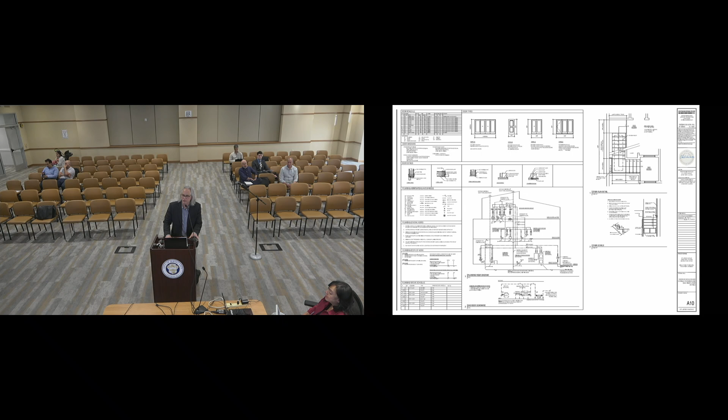I wanted to revisit in a little bit more detail the materials package we sent and uploaded to the Tyler portal that you guys should have a copy of, so we can go a little bit more into the details of what the materials will be, the ones visible from the public right of way and the ones on the rear elevation. So what you're seeing now is the existing front elevation.

There was a renovation done to this project back in 2021, so this is all brand new brick and a brand new roof, brand new windows in the front. And that's when these owners moved in, after that renovation was done by a previous owner.

The new proposal calls for that addition in the back where we get this 6 feet of kind of vertical wall at the ridge height.

After speaking with staff with the previously approved project at 575A, we thought the best approach was to try to make this as nondescript as possible, make it almost invisible as best as we could. So we used fiber cement panels as opposed to, let's say, a 7-inch lap siding, which we felt may be a little bit too busy at the top.

Plus the fiber cement panels are a little bit more contemporary. They were much easier to install. You'll notice that the color that we're using is a pearl gray for the fiber cement panel. The coping is an aged pewter, so the coping and the trim is going to get a little bit darker. You'll see this in a second in one of the other images.

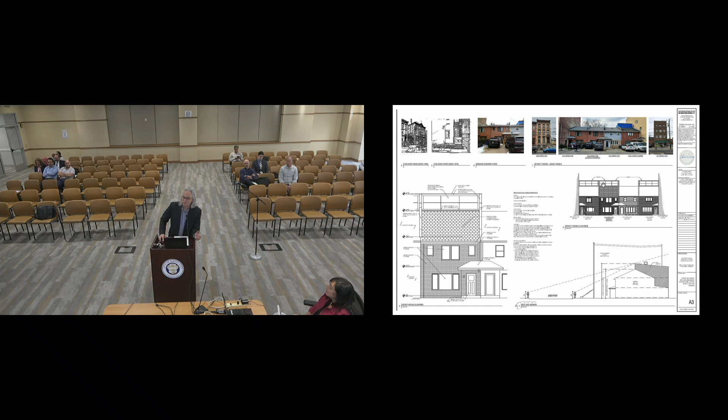And we are keeping that building footprint. We are going to have to tear off the existing roof because the structure wasn't compatible to hold floor loads and other loads. I'll get into the details when we get into the sections. But what you can see here is this is essentially the addition, that hatched area. Again, this will be visible from the public right of way. And to Commissioner Blazak's point, it is proposed based on what has been done before.

I would love to revisit the front wall. I would love to do it with every one of the clients, but this is where we're at the moment with the design. And I don't know if we'll be able to do that once we drop those ceilings.

To move on with this project a little bit more, existing conditions are a little different. You'll notice at the ground floor area — I'm going to use the cursor here, so if you're following along on your screen, this back area here is the existing dining room, this addition that was done previously. You can see that in the rear elevation.

It's a partial gable roof and a partial shed roof from the back of the rear wall. They had built it that way because they wanted 9-foot to 10-foot coffered ceilings, never thinking they were going to do an addition. You can see that with the clerestory glass that's here. All of that is going to end up being removed. I'll show you why in a second.

Essentially the floor plan layout is similar to the other unit at 571: 2 bedrooms in the rear, a bedroom in the front, 2 full baths. The ground level has the dining room already with the footprint back here, so it doesn't need a new foundation, like the adjacent property. For the most part, the existing front is not going to be touched.

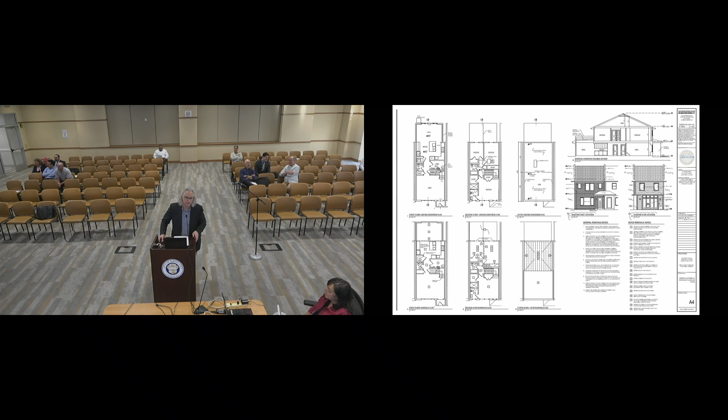Moving to the proposed plans, you can see we're going to try to emulate the coffered ceiling they had here before. We're not going to have the height to do it, so we'll show you that when you see the section. But this is the existing condition at the ground floor, so we're not adding a foundation, and we're not adding to the footprint down here.

What I want to make sure you're aware of is that at the ground level, there's a space between the adjacent building at 575 to the north and the existing rear wall, the northern wall of that dining room. There's a gap here, and this is where all the existing stormwater drains go for the building at 575 right next door -- not 575A, but the building right next door.

So we didn't want to touch that. When you get up to the second floor, you'll notice that the 2 bedrooms extend fully to the rear wall, but they also extend right to the edge of the property line. So we're actually cantilevering over that space so that we get the full width when we go up to the second and third floor. Otherwise, it would have been incredibly narrow, and with this lot already at 18.75 feet, the bedrooms are pretty narrow in the back when you split them in half.

So we're cantilevering over the back. The difference up here is that in this particular approach, the clients wanted a much larger family room. They've got more children than the adjacent properties, so they have more reason to be inside. They didn't want an exterior deck, just more room inside, more flexible space. But they've also added a full bath up there. So that's the kind of layout and approach for this particular project.

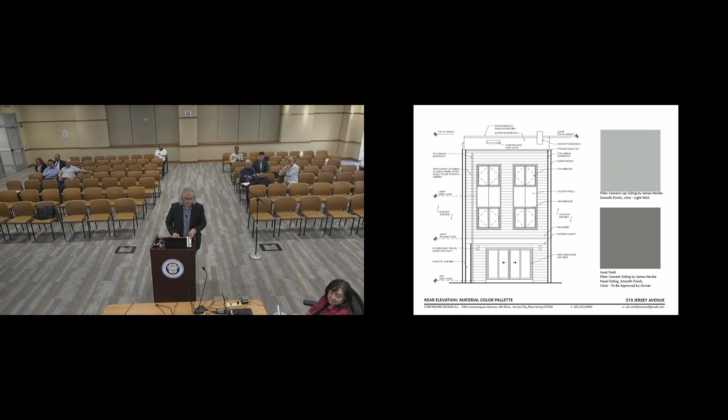Any questions? No? Okay, so if that concludes your testimony, then we can move on to public comment.

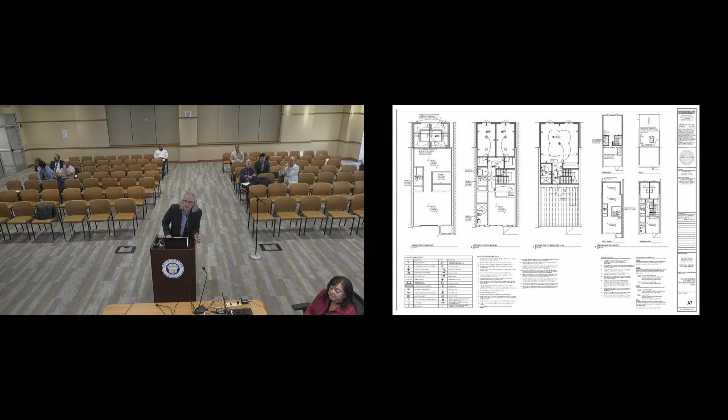The planes are going to be a little bit different because the slopes are going to be a little bit different, and it's easier to show you this in section. Because this slope is running all the way to the back here, we are extending this all the way to the back, trying to match it with the same exact slope that's next to it. We should be able to do that and still make headroom here. That's the goal. The easier way to imagine it—if everybody can imagine where this dimension line is—imagine the roof had stopped there and then there was a deck out here.

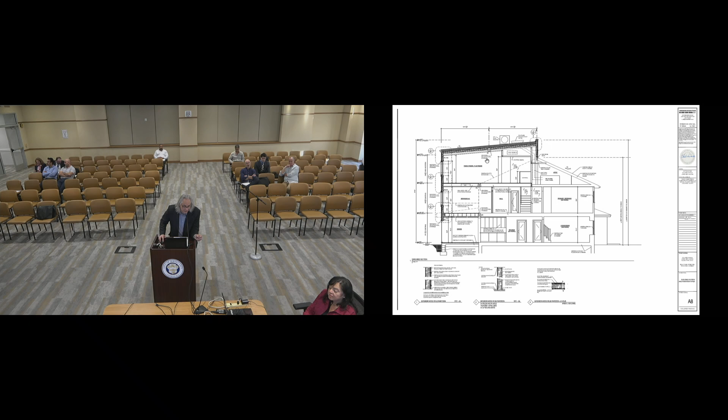However, we really wanted to try to lower the overall height of this 6-foot piece. So the reality is this will be a little bit higher, not in the front, you'll never see it. But if you look at this from the roof plan, comparing all 4 roofs from above, it's going to be a little bit higher because we kept that low point. That's a great observation, but they won't all be perfectly in plane from above.

I wasn't asking about the rooftop plane, I was asking about the ridge plane. Oh, the front's all in line. They're all in line, yeah. They're all coplanar to each other.

Thank you. So more explanation than needed. Apologies, okay, yeah.

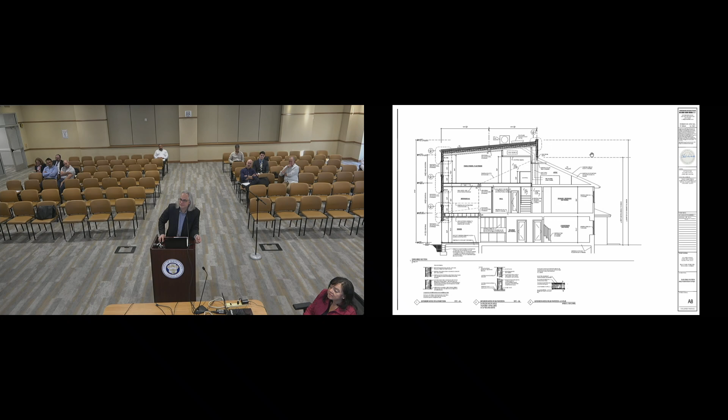As I was saying, staff believes the proposed addition is contextual and in line with the size of additions, particularly at the neighboring structures. HPC staff believes this application could be approved due to the building's non-contributing status in the district, with the following recommended conditions as laid out in the staff report. These are all the same conditions except on this one there is no rear lighting proposed. So if any does get added between now and construction documents or permitting, we just ask that it be downcast in nature.

Other than that, there are standard conditions. So again, HPC staff recommends a motion to approve with the conditions as laid out in the staff report.

By the way, just before we get to a motion, I want to state for the record that if there is another proposal for the missing tooth in this, I don't think it needs to match exactly the same. If it's the same architect and wants to do something else that's different but compatible, that's fine, because these are non-contributing buildings and this doesn't detract. I think there's a tradition of rooftop additions that are similar but can have differences, or even rows that have different A, B, C patterns, etc. So just for the future, if something different wants to be done, it can be done, I think.

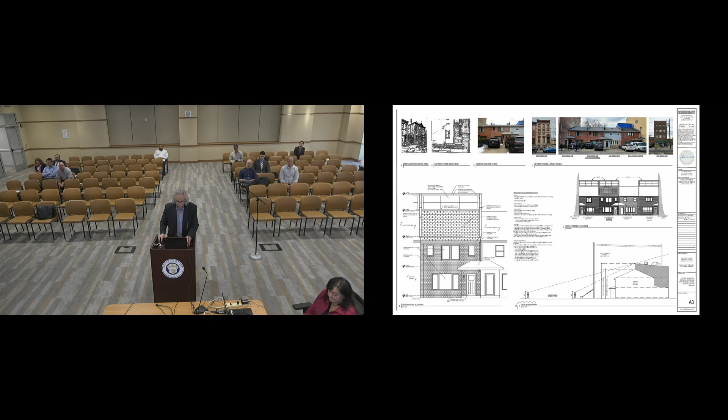Commissioner Sandcamp. Aye. Commissioner Gunther. Aye. Commissioner Sakong. Aye. Commissioner Blazak. Aye. Commissioner Gordon. Aye. And Chair Cronin. Aye. There are 6 votes in favor, no nays, and no abstentions. The certificate of appropriateness with condition is approved.

Thanks for your time. You're welcome. See you in a couple months. Maybe. Okay, moving right along to case...

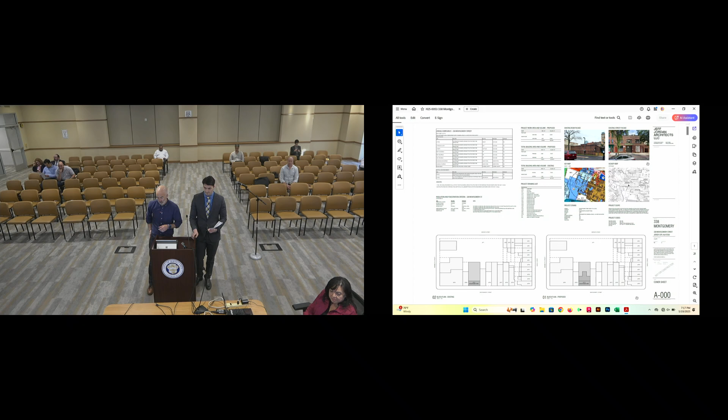H-25-0053. Stephen Joseph, Esquire, applicant on behalf of Selena Zido and Thomas Cook, owners. The address is 338 Montgomery Street, aka the Progress Printing Building. It's in the Van Vorst Park Historic District Extension / Montgomery Gateway redevelopment. The applicants are seeking a certificate of appropriateness for the enlargement of the existing second floor with an addition to the rear, construction of a roof deck visible from the public right-of-way, installation of new windows, doors, and new in-swing doors at the vehicular entrance of an altered contributing vernacular purpose-built industrial modern warehouse with classical revival overtones, constructed circa 1925.

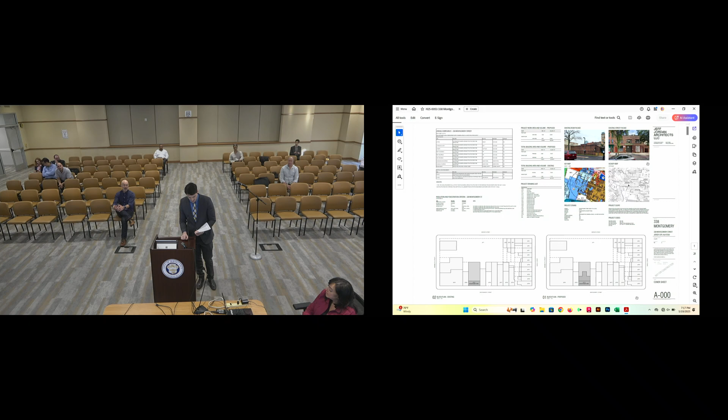Good evening, everyone. Michael Higgins on behalf of the applicant this evening. This is 338 Montgomery, the Progress Printing Building, which I'm sure most members of the commission are familiar with. It's in the Van Vorst Park Historic District, and we're here seeking a certificate of appropriateness for renovation, rehabilitation, and an addition to the existing second story of the building. It's situated mid-block between Monmouth and Varick. Without further ado, we'd like to have our architect sworn in, Jeff Jordan, and he can walk the commission through the plans.

Mr. Jordan, do you swear that the testimony you will provide this evening will be the truth, the whole truth, and nothing but the truth? I do. Spell your last name for me. Jordan. Staff notes that Mr. Jordan has previously presented in front of this board and been qualified as an expert in the field of architecture. Thank you, commissioners. It's been a while, it's nice to see you all again.

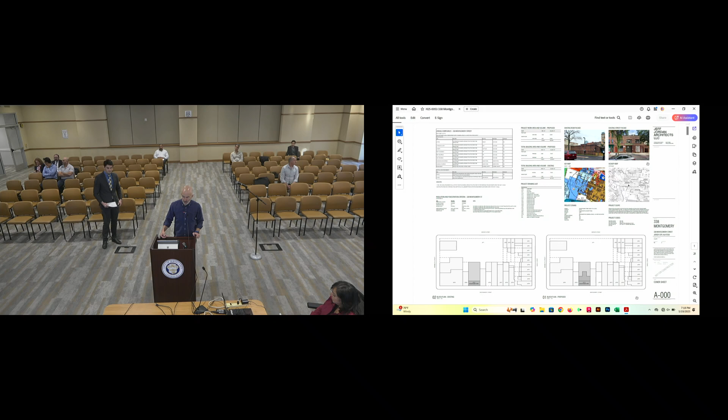As was noted by counsel, the proposed project is a second-story addition to the Progress Printing Building. For the record, that building, as shown in the site plan here, is 100% lot coverage. However, the second floor occupies roughly the front 20% of that coverage.

Our clients are interested in expanding the second floor to create a single apartment that they will use for themselves. The ground floor, as shown here, is currently a garage type space and has been used traditionally as a garage and as a printing shop. That space will remain largely open, unprogrammed for now, but they would like to retain the garage portion as a small garage for their unit, occupying the central part of that. There'll be access to one side up to their unit, as well as some storage and a small bathroom. So they'll be occupying a small part of the first floor.

On the second floor, as you can see in the existing condition plan, there is a small apartment up there now with several smaller rooms. That space will be reappropriated. There's an existing brick wall across the back, and much of that will remain, though we're going to remove a portion to bring the stair up. Otherwise, the apartment will expand backwards toward the parking lot in the rear, not occupying the full second floor but taking up a bit more space than is currently there. The new apartment will have 3 bedrooms, kitchen, dining, living space, and will look out onto what will effectively be a roof garden in the back.

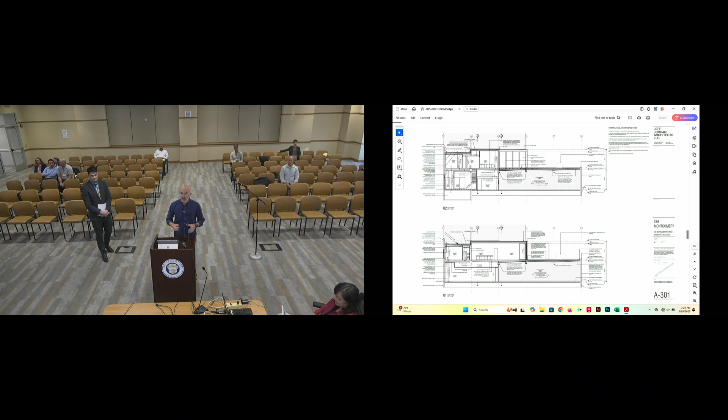Are there any questions from the commissioners?

Do you have any photos of the existing rear facade of that second story?

I apologize for not having better photos from up on the roof there. You can't really see much of it in this. I tried to get some extra photos in here. Thank you, Commissioner Blazak. What I will tell you is you can see in the elevation drawing there are some original openings.

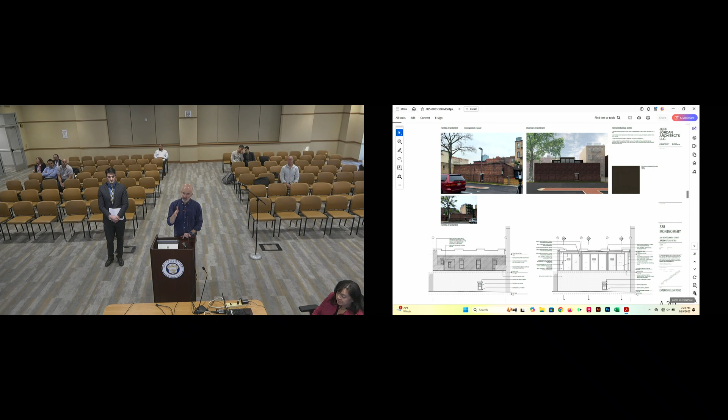They have been filled in subsequently with block, not brick. They're not particularly attractive, and there was a small addition built onto the back which was more utilitarian in nature. So the rear facade has already been altered over time, and those windows have been, in my opinion, compromised. With the proposed plan changes, we're actually trying to keep as much of that back wall intact as possible as a feature within the space. The existing window openings will be reappropriated as doorways moving through the space and plan. The rest of the wall, which we couldn't keep for the stair, will go away.

Any other questions?

Could you walk us through the restoration of the primary facade with a bit more detail, the different elements, the new windows and door, colors, materials? Absolutely. So the brick will remain. It'll be cleaned using the gentle methods typically used in these applications.

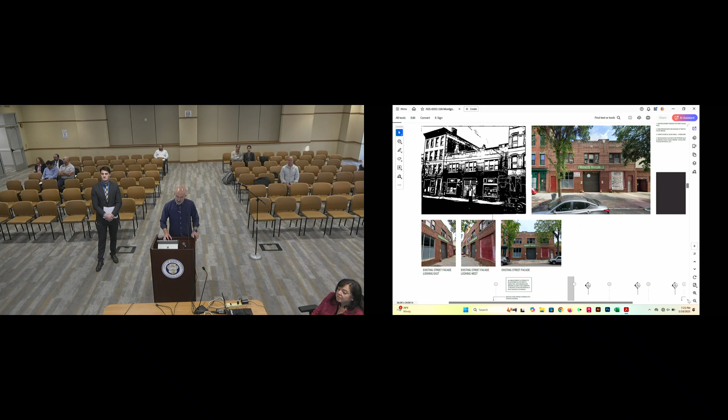The existing window sills at the storefront windows in particular have been painted, as you can see in the images here. The paint will be removed so the existing stone will be exposed and left intact, similar to what's happening on the sills on the second floor. The new windows will be wood windows, painted brown.

We have the color on here as well. And then the doors, the carriage doors, we have some details at the back if you'd like me to go through them. Those will be all wood, and they're quite large. Bear with me.

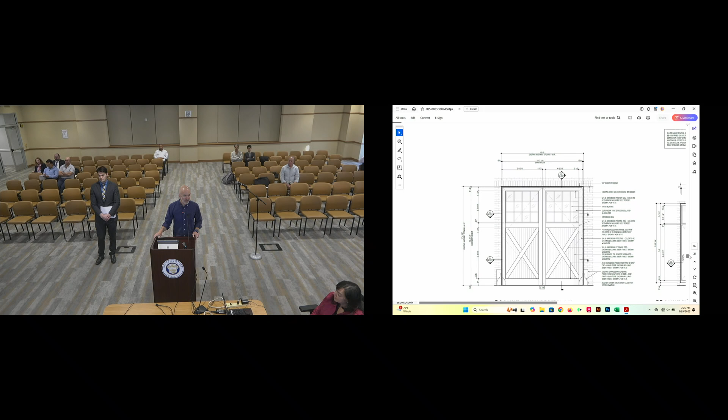So these are large wooden units which will have—I apologize—the upper 40% of those will be lights, divided lights, and then below will be a panel with that cross pattern, that brace pattern, and then rails and stiles around that. All these details we've worked with staff already to a certain degree, but the idea is that as we get into construction and have a better opportunity to take a look at the detailing of the windows and doors, we'll go through and work through them with them in greater detail to resolve some of those finer details.

Does that answer your question, or is there more? Yeah, I wanted to see more details about the windows.

So these are just flat windows, not box windows or bays or anything like that? Correct, yep. These are flat windows. The lower windows are a storefront window with transoms above, divided as shown in the drawing. The upper apartment windows are currently a set of sort of triple double hung windows, no divided lights. That condition will remain with a new window.

They do have those muntins or elements in between them, dividing them currently. All that will be exactly as it is. It's just there'll be new windows to replace the older ones, which are single pane and poorly operating at this point. The sill will remain intact. The lintel, all that is in good shape and will remain as is. So these are essentially just new infill windows to match the historic condition.

Thank you. And is all the brick at the ground floor original to the best of your knowledge, or is it a different mortar or different brick? I think it's been painted. Here, I'll go to that photo. Given the nature of the neighborhood, maybe there's been some activity along that brick through the years.

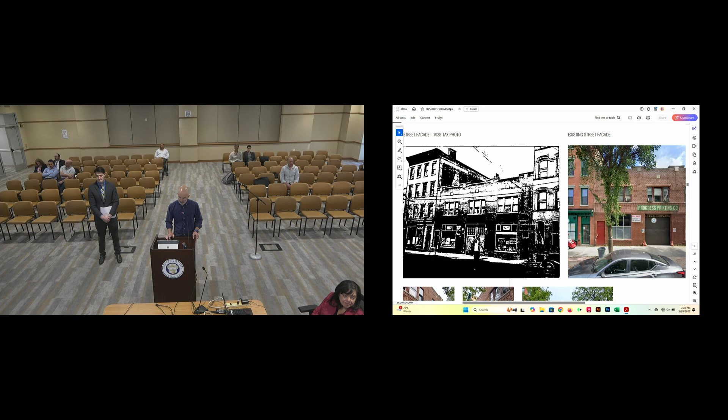And this deep forest brown that's being used for all the different frames, do you have a sample of that? I don't have a physical sample with me. Is that what that is? Yeah, that's what it's meant to be—of course the color never comes out quite right in these images. So what we'd typically do in this application is during construction with staff, we'd share samples just for final approval.

Same with on the back, there's a dark bronze color being proposed for the metal panels in the window frames. It's all meant to be the same, both for the panels and the frames. That's something we would share once we have those final material selections.

Another question is about the commercial space on the ground floor - is that conditioned commercial space? In other words, does the apartment above need to be insulated, not just fire rated against the commercial space below?

Yeah, it'll definitely be insulated and fire rated. I don't believe, Tom, is that garage space conditioned presently? Any heating or cooling in there?

They're super old. Sorry, he's the owner - my apologies. There's some existing equipment there now. The plan longer term is to actually use that space for something else, and it will be conditioned properly. But the apartment will definitely have its own insulation. It'll be self-sufficient in that way.

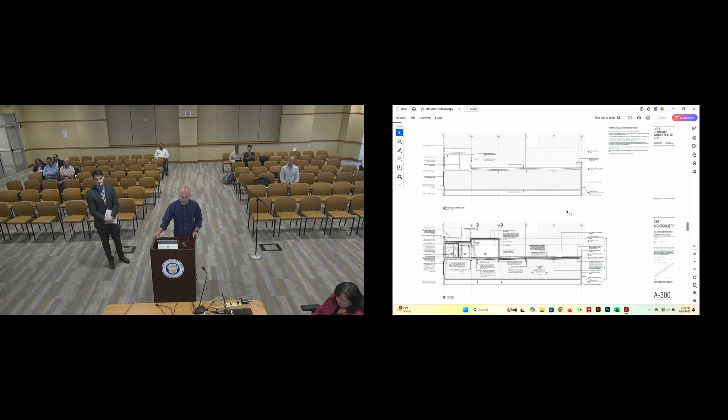Yep, absolutely. You can see in the section drawing here, we're showing insulation graphically there as well, assuming that'll be the case. And we have a good amount of height to work with there in terms of the ceiling heights as is, so we will not need to raise that roof any higher.

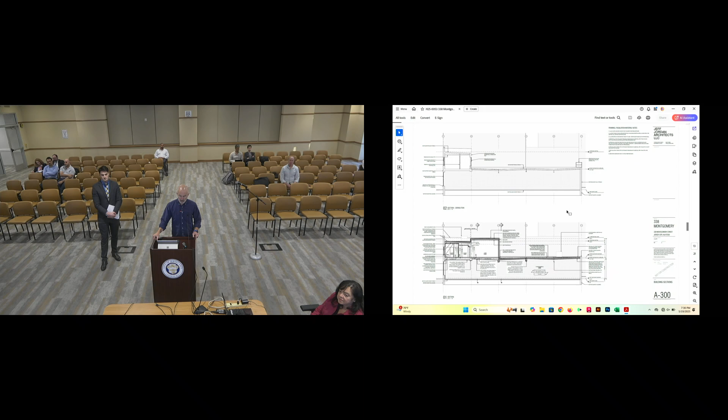Shall we move on to staff comments? First, we're going to do public comment, as long as there's no other questions from the commissioners. Does that conclude your testimony, Michael? That does. So if there are any members of the public who would like to address the commission regarding this application, please approach the public comment mic.

Staff sees no members of the public present and recommends a motion to open and close public comment. Motion. Second. All in favor? Aye. Aye. Okay, now we can move into staff comments.

I think Dan is working. We're experiencing some slight operating difficulties here. Who was smart enough to do this? That's my report. Thank you, Jonathan. I appreciate it greatly.

Staff believes that the application is generally consistent with the standards for the Secretary of the Interior standards for the treatment of historic properties. The architect and I have met extensively over the property, and we have a good working relationship.

So I think that we can work out any details of the particulars of the windows, the door, and the two side entry doors, as well as the mortar, and any cleaning or restoration of the brick and the stone at the first floor on site with the contractor.

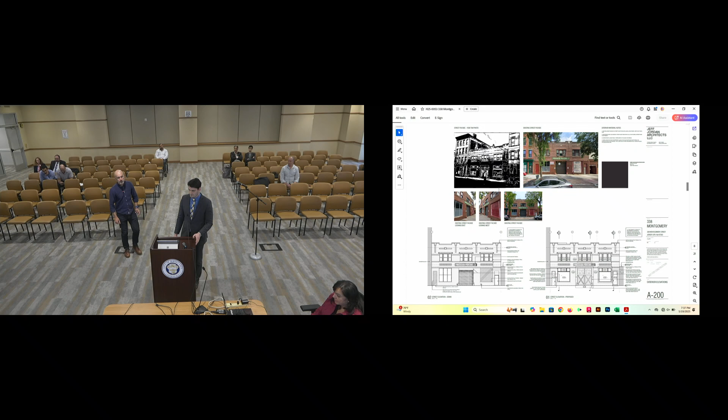The certificate of appropriateness with conditions is approved. Thank you, everyone. Good evening. Thank you. Take care. I just have to excuse myself for a moment to go get a glass of water. Of course. Thank you. Okay.

Alrighty, we'll be moving right along here. Case H-24-0410, Jensen C. Vasil, registered architect, applicant on behalf of Hector Herrera, owner. The address is 289 4th Street in the Harsimus Cove Historic District. Certificate of appropriateness for the construction of a 2-story infill addition at the 3rd and 4th floors of an existing 4-story rear addition and the construction of a new iron fire stair at the required means of egress visible from the public right-of-way. Gut interior renovations, restoration of front facade, including the removal of existing triple window at the parlor floor and the restoration of the original 2-bay window arrangement. The replacement of windows, the replacement of doors at the basement, and the parlor level repair and repainting of brownstone stucco at the front of an altered contributing 4-story 3-bay Greek Revival brownstone fronted row house constructed circa 1860.

Do you swear that the testimony you provide this evening will be the truth, the whole truth, and nothing but the truth? I do. Please state your full name. Jensen Vasil, V as in Victor, ASIL. Thank you. Witness is sworn. Staff notes that Mr. Vasil has previously been qualified in front of this board as an expert in the field of architecture.

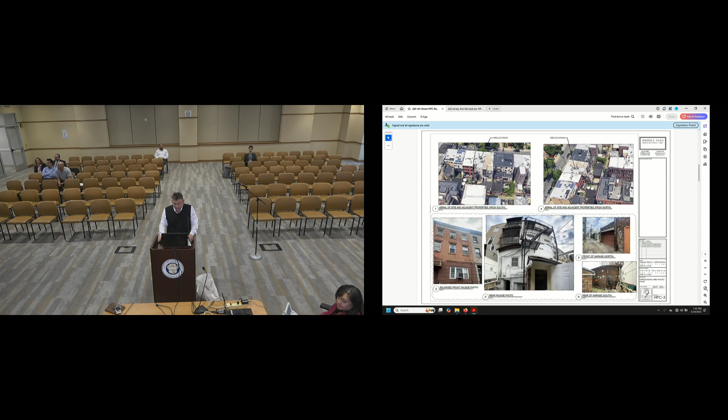On the next sheet, HPC 3, we have some photos of the site, starting from the top left: an aerial from the rear of the property looking back towards 4th Street. You can just catch a glimpse there of the cutout at the top 2 floors. There's an existing partial addition, and then there's a small cutout piece there that's currently used as decks.

On the photo below it, we have an up-close photo of the front facade where you can see the brownstone rustication at the bottom 2 floors, as well as the lighter brownstone that has a tooling pattern in it on the upper floors, and also the cornice, which is chipping paint, but is actually overall in fairly good condition. There is an aluminum awning there that would be removed.

And while I'm on that photo, just to call reference to the fact that the lintels and the sills from the original opening are still there, and they left them and filled it in with that 3-bay, 3-wide window.

The rear of the property is, as you can see, very tight. This is a composite image. There's a basement in the first floor that are to the full extent - that footprint won't change. On the left, you can see the 2 decks that are filled in. Those would all be removed, and the building would go all the way up. The fire escape contraption that's there would be removed and replaced with a proper steel exterior stair.

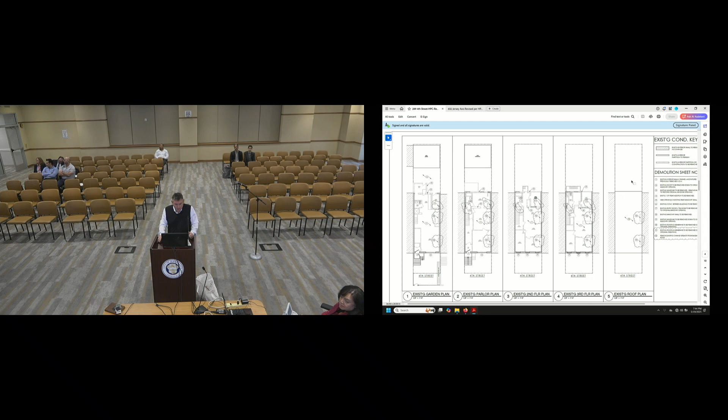On the next page, HPC 4, we have the existing layouts. Right now, it's a duplex apartment on the garden and parlor level, with 1 unit each on 3 and 4, or on 2 and 3. That's how it will remain.

That configuration, the interior with that stair will all obviously be gutted, and the addition will fill in the back. We are keeping the remnants of the wall at the original addition - that 1 foot piece that shows or demonstrates where the original building ended. We're proposing to remove the chimney breasts that go from the garden level to the roof.

On the next sheet, HPC 5, we're showing the proposed layouts for the units at garden and parlor. Again, that's a duplex unit, 4 bedrooms, with 2 on the upper floor and 2 downstairs.

That's going to have the kitchen - it's an in-law kind of situation, so they have 2 small kitchens. They have the kitchen on a small kitchen up there on the parlor, and then one downstairs. It'd be like a mother-daughter setup, with an apartment, the bedroom and bathroom downstairs, and then another bathroom upstairs.

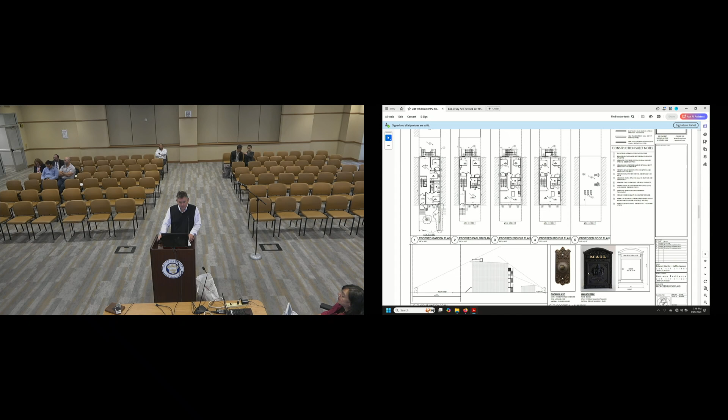The sightline diagram on number 6 shows that the proposed AC units, which would be located on the roof, cannot be seen from the front public right-of-way. Also, from the alleyway over the garage, you can catch a glimpse of the 3rd and 4th floors.

On the following page, HPC 6, we have the existing front elevation, which is drawing number 1. The upper windows would just be removed and replaced in the existing openings. The entry door and awning would be removed, and a new door to match the 1938 would go in.

That triple double hung window would go away, and then we would keep the original, go back to the original lintels and sills, and fill the openings in with the windows at the parlor level, which are quite long.

Additionally, on the garden level, the same configuration, although there were - because it was that rusticated bands with no headers there - it would just be the water table that forms that maintains as the header. So we would actually bring the height up a little bit, and then the sill down to about 4 inches above the grade level.

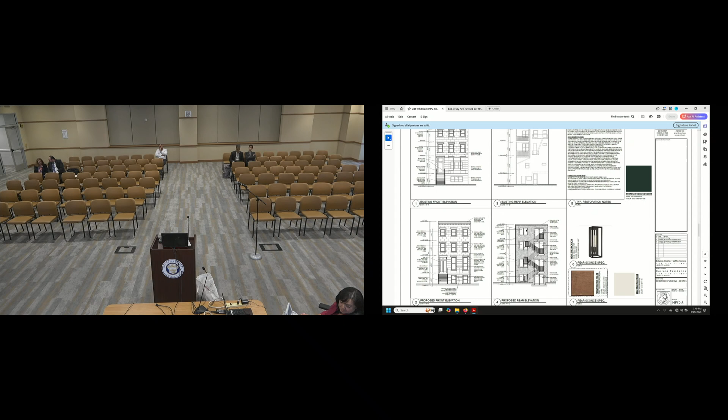So I think right now I'll pass around some samples. This is Palm, which is the stucco color, the rear stucco color. The front window color, which is Essex green. The fascia and trim colors, which are Benjamin Moore black, the historic black. The Class A rated fire-resistant wood for the fire escape. And then finally, the Marvin aluminum ebony color for the back windows. That also is a good approximation for the gutter and leader because they're also black aluminum.

On the next page, HPC 7, you can see the section of the building just filling in, and also the removal of that rear addition. The details for the steel at the fire stair, which, as noted in the report, is utilitarian, but we do have a top and bottom rail with some steel balusters. We have a section for the little stairs coming out from the garden to the rear yard, and the gutter detail.

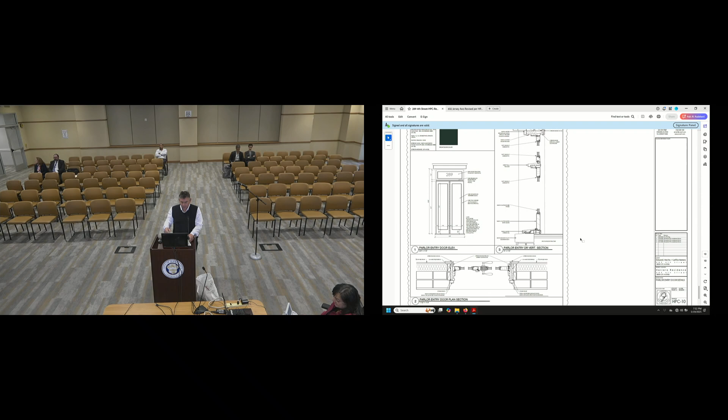On sheet HPC 8, on the left are the front window sections, including that color, and the door under the stoop, which has 2 panels with a glass upper light. Finally on HPC 9, we have the sliding door elevation and details going into the rear, as well as the casement window detail also in the rear. On the last sheet, HPC 10, we have the sections in vertical section and plan section of an elevation of the entry doors, which would match the 1938 photo and whatever surrounding site evidence for original doors we can gather from the block. This would include the sticking around the window openings, the glazing lights inside the door, and the transom.

And that concludes the presentation, and I'd be happy to answer any questions. Any questions?

Yeah, I do. This might be more of a question for staff. Do we typically accept such a dark color for window sashes on Greek Revival buildings?

Essex green is a color that we do see an awful lot, I believe it was Essex green. Yes, right. It's a common color here in Jersey City on buildings that are not being restored to a period of 1860, but you would see it during the building's period of significance, starting possibly in the 20s and definitely by the 30s and 40s.

Okay, thanks. Thank you for bringing in samples. I mean, it was noted earlier. And do you have any idea when the existing addition dates to?

I don't, no. Okay, I don't. The existing addition, at least in part, the L appears on the 1873 Hopkins map. And it does appear that another wing was added on and some infill later on, probably about 1920. But there's no historic fabric left even from that original addition?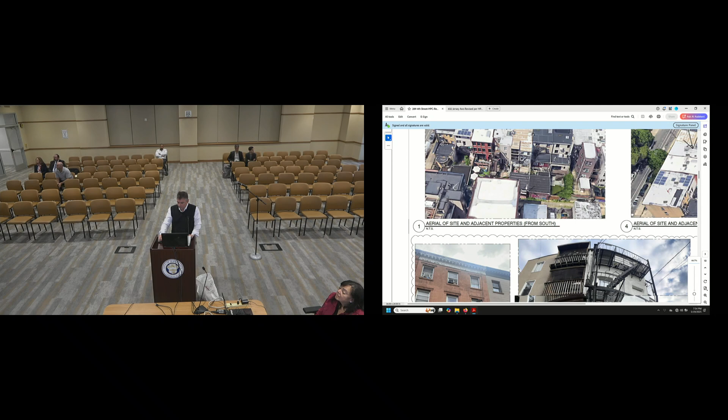Or the very little, if any? Windows have been filled in, altered. There are a couple of sills left, but the integrity of the rear has been destroyed.

Normally, I wouldn't hesitate with a full height, full width addition, but looking at this context, looking at the block, it seems like this is a site where it can take it, I think. This will, however, retain the historic rear wall of the L.

Yes, okay, and the lower part of the addition to the west or to the east. This is only going to be a 2-floor infill where you see that wooden balconette that is going to be filled in. The fire escape will be taken off and new fire stairs will be put there.

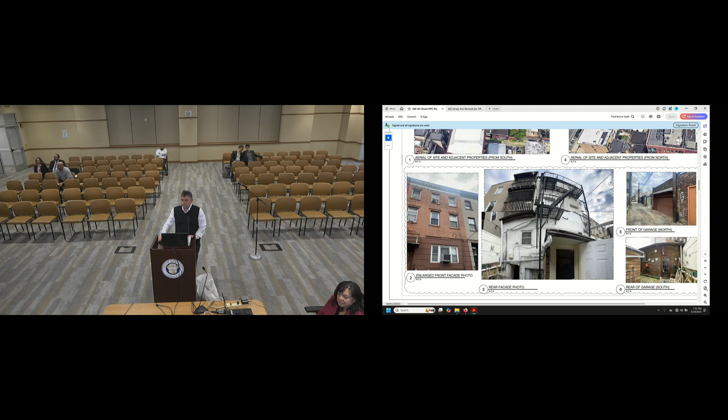Any additional questions from the commission?

I just want to say I'm enthusiastic about the restoration of the primary facade. This building needs it, and I'm going to be happy to see that aluminum awning come off and the restoration of the parlor level windows. I think it's a nice improvement. Thank you.

I too share the enthusiasm about this project. Long overdue, I think, and a welcome project. What's the scope related to the entrance under the stoop?

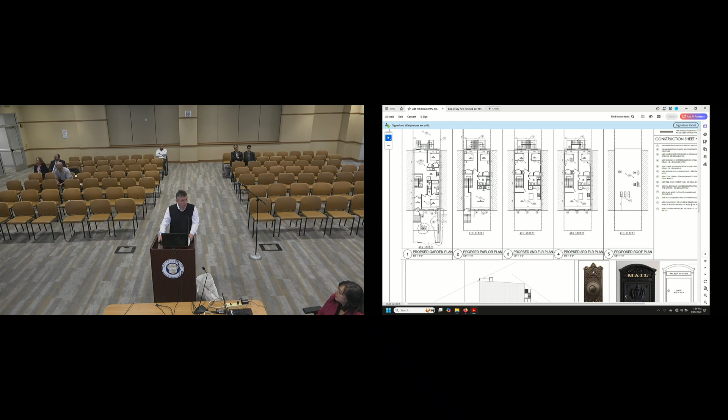So we're planning on replacing that door, but we're not planning on doing anything to that existing paving that's there.

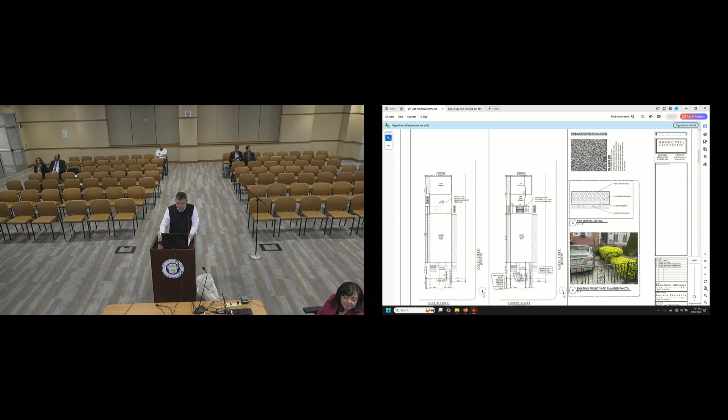And so that white gate that I'm seeing in the existing photo, is that the door that would get replaced, or is that remaining? So yes, that door is going to be moved actually to where it was underneath the stoop. That area would be filled in, and then we would have it directly underneath the parlor level door. Okay. I just note that the front elevation should reflect the continuation of that material under the stoop, either with a cutaway elevation or something.

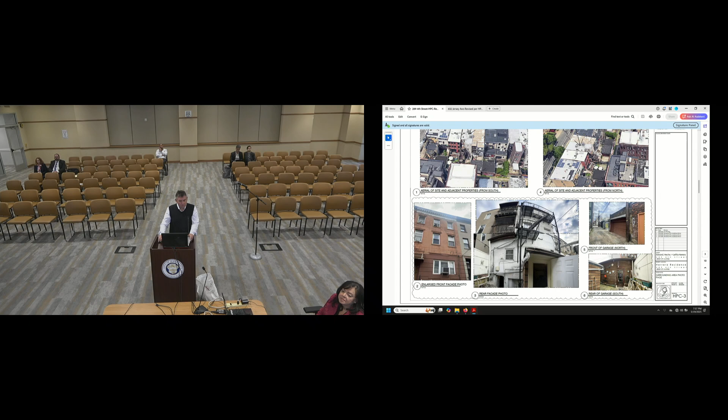Got it. The other question that I had was, in the historic tax photo, there's a peculiar thing that I'm seeing at the bottom of those parlor windows that almost look like sort of metal panels. I can't tell if the window's just partially open or if that's a fixed architectural feature or a flower box. Do you know what those are? I believe that is infill.

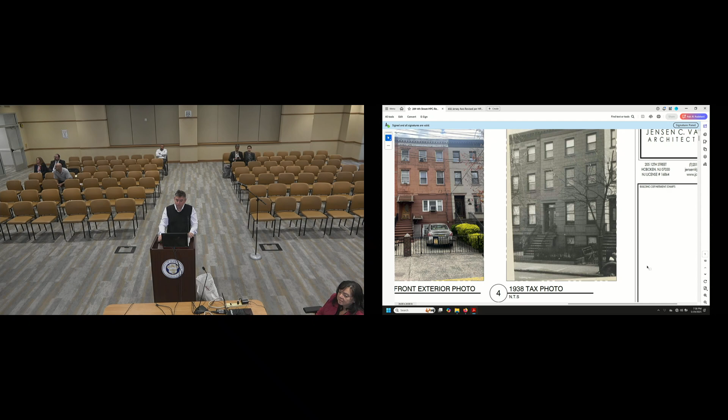I believe that originally these windows would have gone down to the water table. They were originally brick buildings that historically had a coat of rendering or stucco placed over them to simulate more decorative stone. The parlor windows were filled in when they were no longer fashionable and windows were more standardized. But if you look at the current photograph, you can see those same boxes. The shadow lines are a little different, but you can see those same boxes under the historic quote-unquote sills.

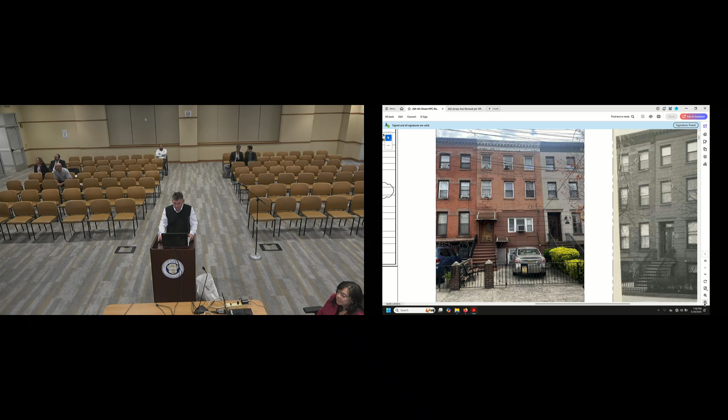Clearly the proposal is a vast improvement over that kind of whatever it is, the 70s suburban thing happening there. I guess the maybe obvious dumb question would be, why not bring it all the way down to the water table again? Would that be prohibitive for the client? I don't think that would be prohibited by the standards. It wasn't something that was brought in. This is a condition that is documented within the period of significance of the building and the neighborhood.

And we no longer have the windows that are there now, they are a 1/1. They are a modernization from the original building, as is the double parlor door with the transom atop. So staff's opinion is that it's quite possible that the infilled windows are part of a later rehabilitation within the period of significance, and they kind of go together.

And like Commissioner Gunther said earlier about the window color, I think she's also thinking of earlier Greek Revival buildings that often had multi-light windows. That's probably when you had that configuration when the parlor windows went down further, all the way down to at the same level as the door. So if we're not going to restore the windows to multi-light configuration, maybe a lighter paint color, we're restoring this kind of a later period of significance, probably more like turn of the 20th century or so, than the original configuration whenever this was built.

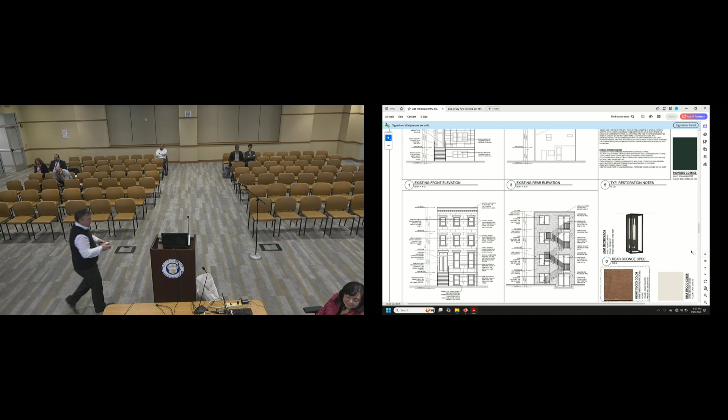The proposed parlor floor windows will be revised to reflect the historic configuration as shown in the 1938 tax card photograph. Exploratory demolition will be undertaken to determine the exact size and position of the windows before the windows are ordered. The architect shall review all site evidence after demolition, shall review all shop drawings for the proposed windows, and shall present his findings to staff for approval before purchase, manufacture, or installation of the new windows.

I did leave out a section that said the same condition shall apply to the basement windows.

The proposed parlor floor front facade entrance shall be revised to reflect the historic configuration and detailing as shown on the 1938 tax photograph and available site evidence at adjacent buildings and on-site during exploratory demolition. The exploratory demolition will be undertaken to determine the exact size and position of the door, transom, and framing before the ensemble is ordered. Architect shall review all site evidence after demolition, shall review all shop drawings for the proposed door ensemble, and shall present his findings to staff for approval before purchase, manufacture, or installation.

The same condition shall apply to the basement entry. I believe that in the absence of direct site evidence during demolition, we're going to find paint ghosts that we will be able to coordinate with the tax photograph and with neighboring houses of the same period.

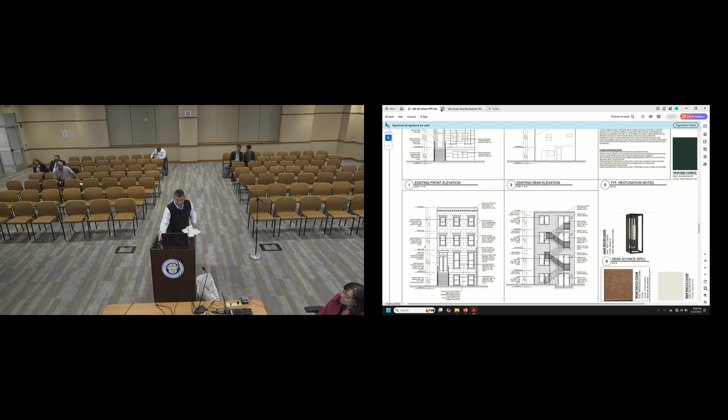All righty. Yeah, we're going to take a little 5-minute break now. Okay, sounds good. See everybody. Make us look good.

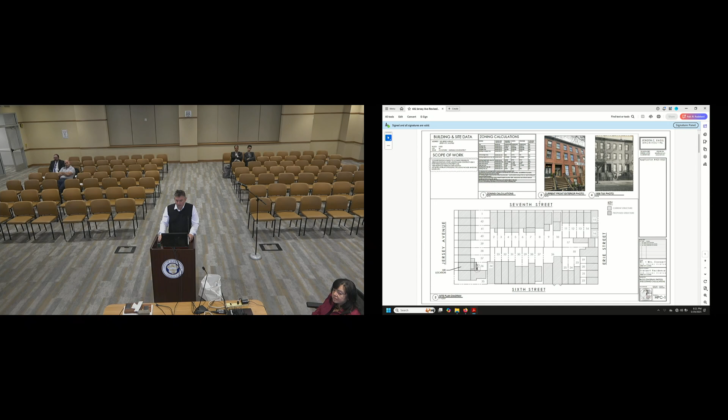On the next page, HPC 2, we have an existing site plan and a proposed site plan. On the existing, you can see the outline of that addition with the gap between the addition and the neighboring building on the corner. The rear right now has a planter bed at the perimeter and is blocked in on buildings at the rear and on the right-hand side. The proposed condition would have a full width addition against the adjoining property on the corner, 60% lot coverage, and that stair to the rear with some bluestone pavers.

We chose synthetic grass only because, as you'll see in some photos, there's very little opportunity for it to get any natural light. They do have young children, so they want a place to play, so the manicured shade garden doesn't fit their use. We would use thermal bluestone in the back, and the pervious coverage is maximized on the lot.

On the next sheet, HPC 3, you can see it's quite a lot of vegetation there, but on photo one, looking to the north from the corner, you can see the building on the corner as well as the building right behind. You can catch a glimpse of our addition, which is lined up with the addition at the back of that corner building, and the little deck there.

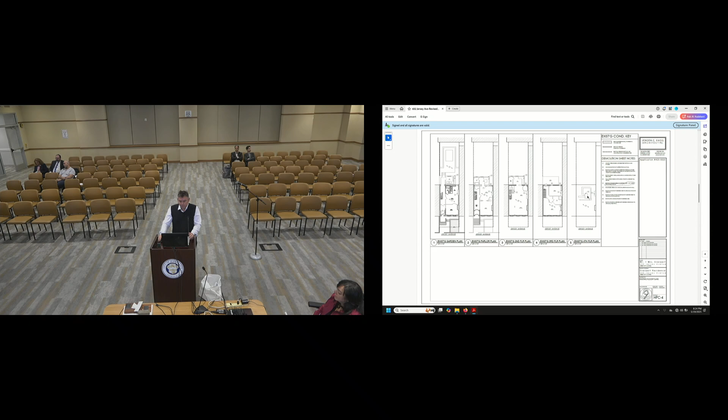On top of the existing roof, there's a rooftop RTU with exterior ductwork, which is very unsightly. All of that would be ripped out and the mechanicals would be completely redone.

On sheet HPC 5, you can see the proposed condition where the configuration at the basement apartment stays essentially the same. The kitchen stays intact, the bathroom stays intact. Where there's an addition, instead of a mechanical room, they'll have 2 proposed bedrooms with a little walkout, because their basement level is below the rear yard grade.

There'd be a retaining wall and just a small area, a little bit of outdoor space for the tenant. On the parlor level, there'd be large glass doors with a set of stairs down to the rear yard, to the backyard.

On the parlor, second and third floors, those would all be the owner's unit, consisting of 3 bedrooms with the living, dining, kitchen on the bottom floor, a powder room, 2 bedrooms on the next level with a laundry room, bathroom, and an informal family room in the front on Jersey Avenue facing the street. The master suite is on the top floor.

The top floor is the original footprint, and the terrace would be expanded, though it doesn't cover the full addition. There are setbacks on the right-hand side, which is the north side, and the east side on the back.

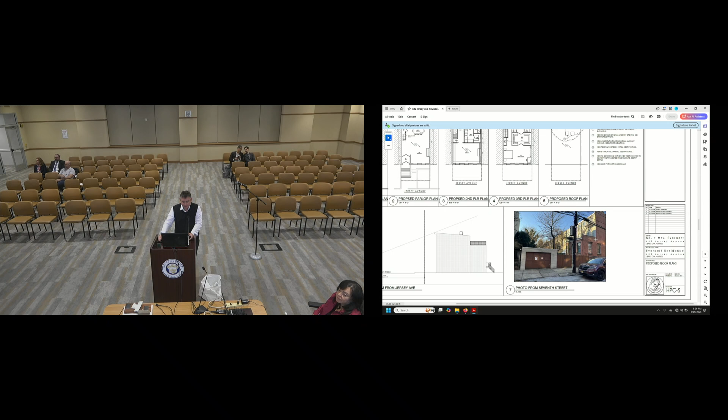Photo 7 is the photo from 7th Street, so that would be the one where it would technically be able to be seen, through all the trees and everything else. I've been there, and this is a winter photo. I've never been able to see that far through all the obstructions, but technically, in a perfect world, you could see it.

On the following sheet, HPC 6, we have the proposed condition at the back. The back right now is cement stucco, as you saw, and that would be replaced with brick.

We have this Belden face brick, this red face brick, black aluminum windows, the big sliding glass doors at the parlor level, and then 2 smaller sliding glass doors at the back at that little private patio that's enclosed with a retaining wall.

The sills would be cast stone, a light gray or medium gray, and there would be a cast stone water table and stucco from the parlor level floor down to the grade. There's a change of material there, with the heavier, more monolithic masonry giving way to the brick on the upper floors. The railing is a cable rail, minimizing its visibility.

From 6th Street, if you go far enough down, you can catch a glimpse of the existing railing. You'd be able to catch this, but with the cable rail, at that distance over the corner building, you really wouldn't make out much of it other than a little bit of black iron work.

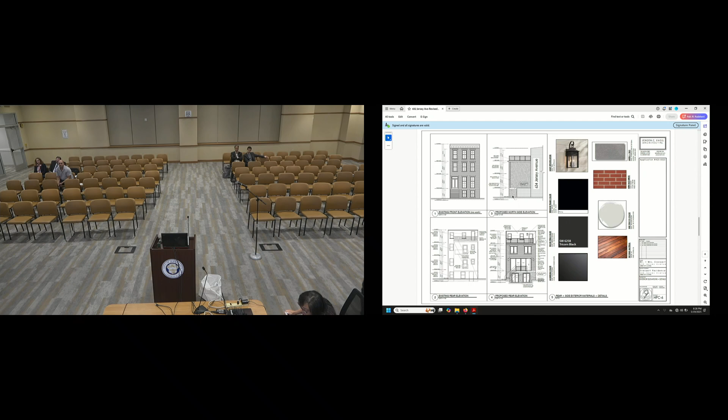I'm going to pass around some samples here: the stone, this is the color of the stucco on the back, the rear windows, all of that trim, which is a different black from the last application, this brick that's on the back facade, and finally the deck tiles.

So it's got, I think, some pretty neutral, warm neutral colors on that back.

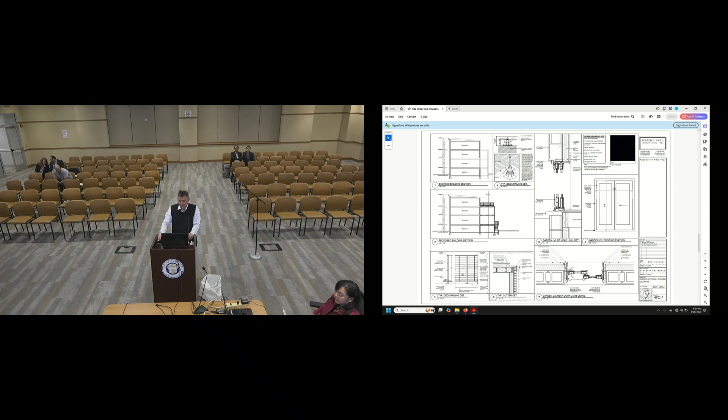Moving on to HPC 7, you can see from the section, especially on drawing number 2, the existing and proposed condition where the addition moves back. The deck tiles would be on a pedestal system, so minimally they wouldn't step up from the back, they'd be less visible. Also at the back, the gutter is a simple gutter with a black aluminum leader. The windows are all black aluminum clad.

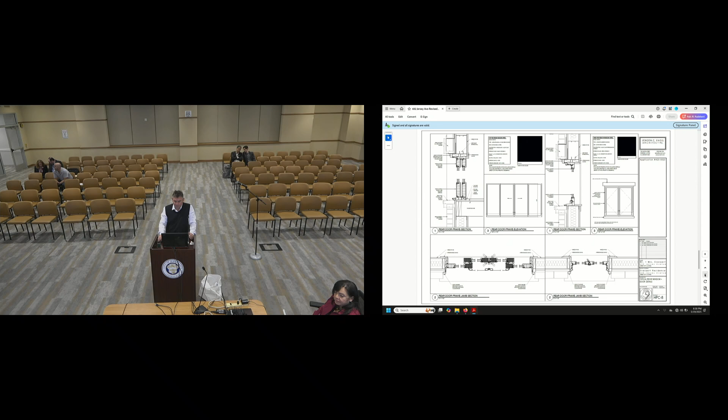On the right-hand side of HPC 7 is the garden level with Marvin sliding doors. On the following sheet, HPC 8, is a thinner profile Marvin Modern with 4 panels, and on the second floor that same Marvin Modern in a French casement, also aluminum clad in black.

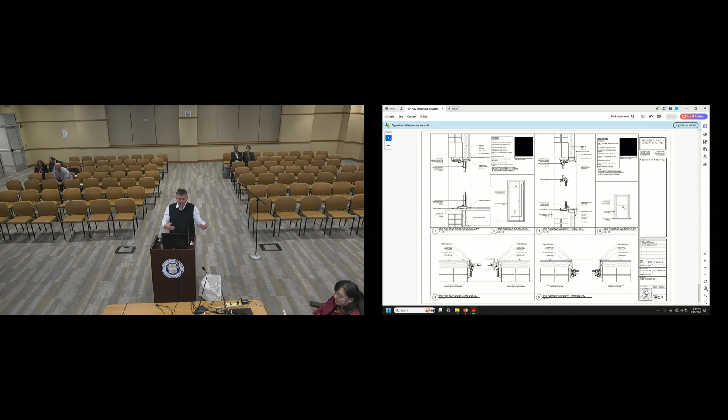Finally on HPC 9, we have the top floor rear door to the terrace, also in aluminum clad, and the last double hung window. This is on the original part of the building, so there's a differentiation in both material and window style between the addition and the original building. These actually fit in the original openings, so there's no change to that configuration at the top floor.

That concludes our drawing presentation, and I would be happy to answer any questions.

You noted that the existing addition railing at the top was visible from 6th Street, and therefore likely the new railing would also be visible. Do you have a section showing whether the coping and the addition itself would be visible from 6th Street? I don't, and it's not directly across the street, it's diagonally down the block. You can just catch a glimpse of it.

And when you see it now, are you only seeing the railing, or also the existing addition? You only see the railing, and only the part that pops off, the part that juts out. Yeah, that part they turned into a fire escape, which extends quite a bit beyond. That is primarily because of the trees and the fence on that side and running through the backyards.

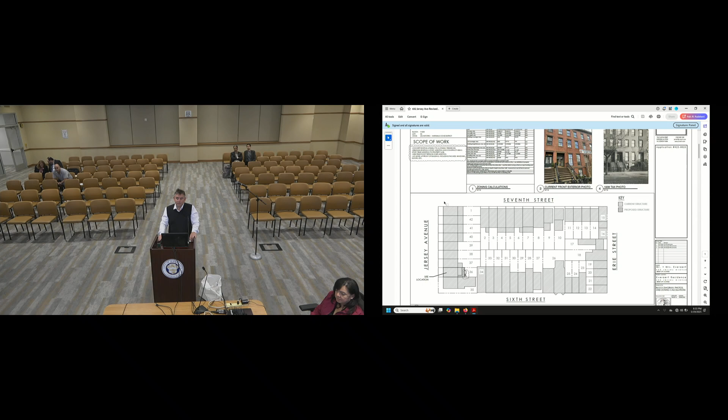So I like that you're using brick for the rear facade instead of stucco. Is there a reason you're not wrapping the side? Is it just weight and attachment issues, or could you extend the brick over to the north-facing facade as well?

We definitely could. There's the brick thickness, and the cost were the two considerations for the side.

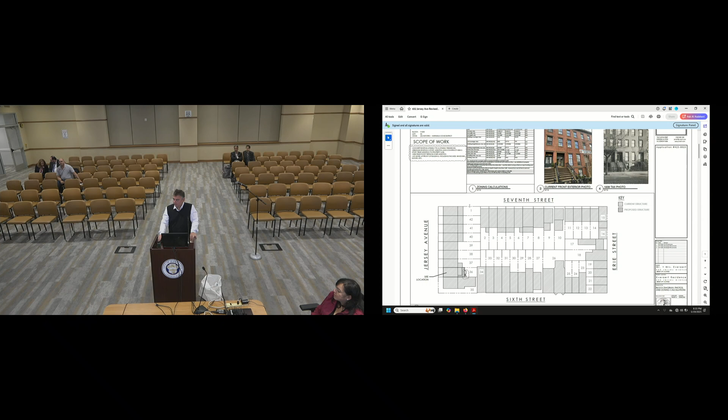Since we can't consider cost, could you explain a little more about the brick thickness and how that would affect your wall system? Sure. Inside, the plan is exactly symmetrical between the two sides, but if you wrap the brick around, because of the brick, the airspace, and everything else, the interior width would decrease on both sides, making the windows and everything a little narrower, because you'd have to mimic it on the left side even though you don't need that thickness there since it's against the building. On the right, that 1'4" of wall thickness would shift everything over.

Any additional questions? Anything further? Does that conclude your testimony, Jensen? It does.

Okay, then we can move on to public comment if no commissioners have further questions. If there are any members of the public who would like to address the commission regarding the application, please approach the public comment mic. Staff sees no members of the public present and recommends a motion to open and close public comment. Motion. Second. All in favor? Aye. Aye. Okay, and we can move on to staff comments.

Again, staff sees the application to be generally consistent with the Secretary of the Interior's standards for rehabilitation. Currently there is a 3-story masonry basement and frame 2-story addition at the rear of the building, which is at least recorded in the 1873 Hopkins map. It appears to be the same addition that is there currently, and it has a very modest Italianate Revival cornice atop it.

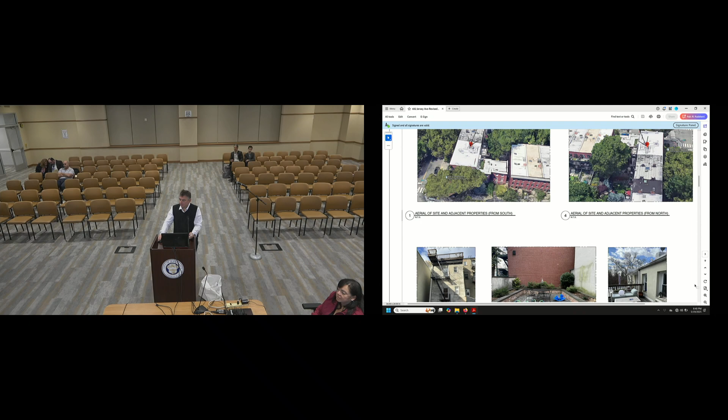The cornice, you cannot really notice it from 7th Street. I do not think that it is necessarily good preservation to remove the cornice and re-erect it on a new addition. But if the architect was to somehow refine or incorporate some design motif from the existing cornice, I don't think staff would have been opposed.

I think at a minimum I would strongly urge the architect to try to at least salvage it, maybe not for reuse but for some installation use in my office. Or, it seems like it's a cornice that's in good shape, and it's a good example of a cornice on a rear facade. I think it's kind of a shame to lose it, but otherwise I think this is appropriate.

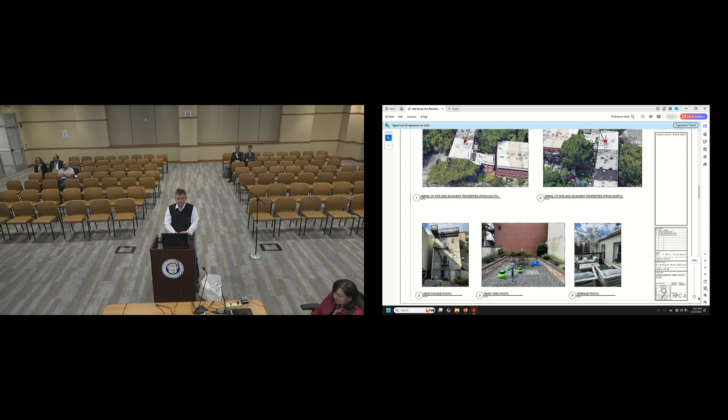Staff's recommendation this evening is for a motion to approve the certificate of appropriateness with the conditions as read into the record and in the staff report. Motion to approve.

Second. Who was that? Sorry, who was the second? You went first, and I'm the second. Okay, Cronin, sorry, just missed the second.

Do you and your client accept the conditions? We do. Commissioner Sankamp, aye. Commissioner Gunther, aye. Commissioner Sakong, aye. Commissioner Blazak, aye. Commissioner Gordon, aye. And Chair Cronin, aye. So we have 6 in favor, 0 against, 0 abstentions. The motion, this certificate of appropriateness with conditions, is approved.

Thank you all very much. Have a good evening. You too.

Okay, moving right along. We are going to H-25-0162. Andres Cortez, RA, applicant on behalf of Salomon, Liza, and Eli Pincus, owners, at 163.5 York Street in the Paulus Hook Historic District.

This is for a certificate of appropriateness for the construction of a 1-story addition atop a previously approved 3-story addition, not visible from the public right-of-way. This application is to approve work subsequent to a previously approved certificate of no effect, H23-068, for site improvements, front facade repairs, new windows and doors, a 3-story rear addition, and repainting of brownstone stucco at the front of an altered contributing 4-story, 3-bay, Greek Revival brownstone fronted row house constructed circa 1860 and altered circa 1890.

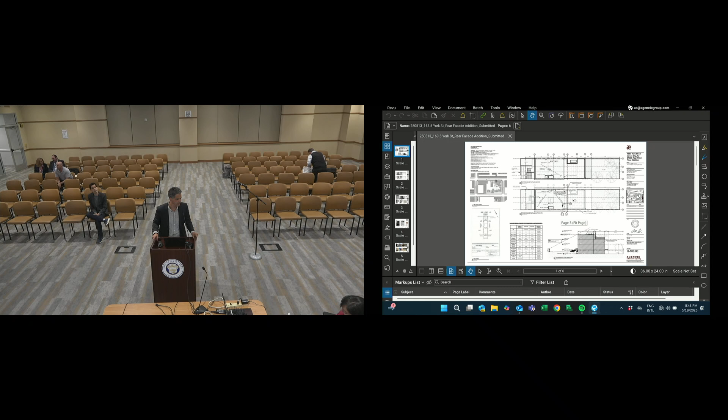Do you swear that the testimony you provide this evening will be the truth, the whole truth, and nothing but the truth? I do. State your full name, please. Andres Cortez. Spell your last. Cortes. Thank you. Witness is sworn. Staff notes that Mr. Cortez has presented in front of the board and has previously been qualified as an expert in the field of architecture. Feel free to begin.

Press the little button until it turns green. There we go. Okay, good evening. Nice to see some of you. It's been a while since I've presented here. So this is a second proposal, we have a previous approval, as was indicated, for a 3-story addition in the rear.

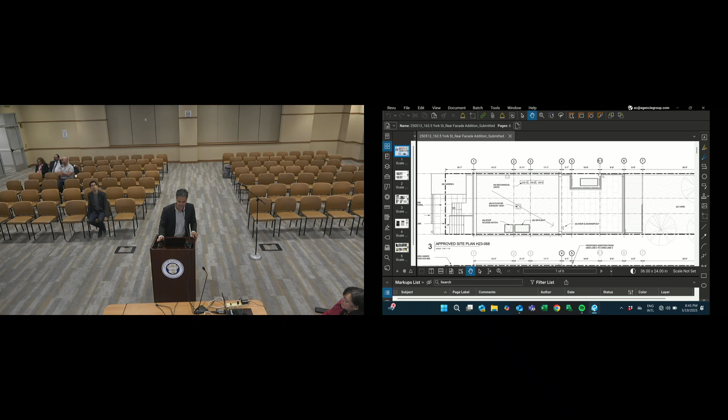What we're looking to accomplish here tonight is a slight enlargement, a single-story addition atop the previously approved 3-story addition. So I'll zoom into the site plans. Here we have the prior approved addition from column line 4 over to column line 6. I just want to point out that we had cut out this courtyard over here to provide light and air to the neighboring building to the east. That partly motivates what we're seeking to do today, because as a result of that cutout, a lot of square footage was not given to the owners for their home, and they're trying to recapture a little bit of that at the top floor so they can have a more comfortable bedroom.

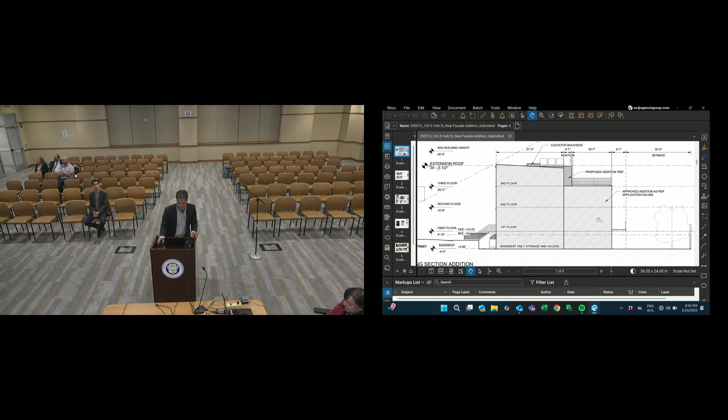So that's what this proposal is, where we're looking to do this enlargement. It's about 70 to 75 square foot enlargement at the top floor between column lines 4 and 5 on the site plan. This area in gray, sort of an elevation zoning section, indicates the proposed total addition. You see here, it's noted as 75 square feet.

The motivation, again, is they have their master bedroom up here. Now that we are midway through construction and can really feel that bedroom, it's quite small. We always knew that going into the project, but at the time, staff recommended that if we were going to seek an enlargement to that room, we should file it separately and subsequently, which is what we've done and why we're here now. Here's the proposed impact on that bedroom. It just makes it a comfortable bedroom, really. Everything else stays identical to what was shown in the prior approval.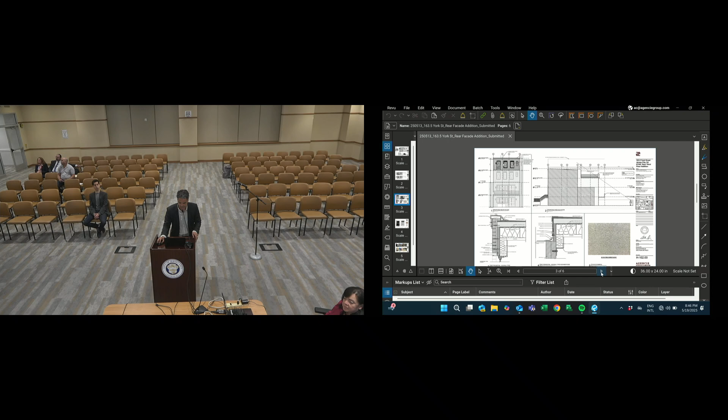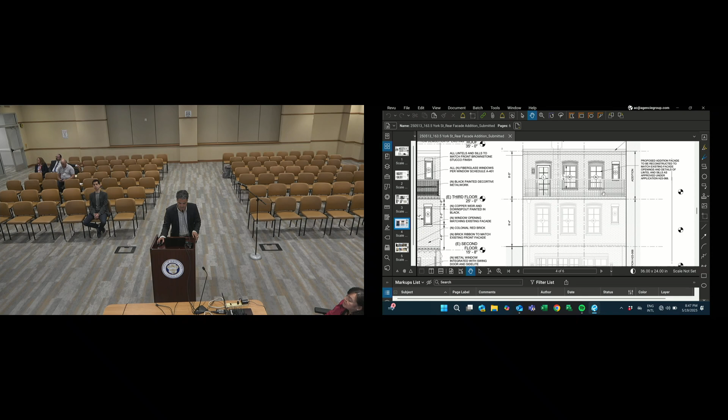I think I'll just skip ahead to this drawing. On the left is the prior elevation, and at the top floor, the fenestration is the existing fenestration - there was a door, 2 windows, and a smaller side window over here. We had proposed this ornamental metal railing up there for a deck. We're essentially proposing to keep the same articulation at that top floor, same door, same windows, same window configuration. We've measured those carefully during construction and are proposing to keep the prior approved railing in place, just a little bit smaller now that we are trying to enlarge that room.

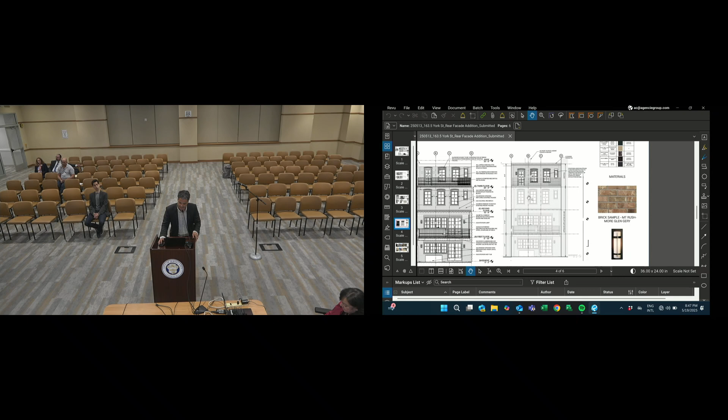Materially, we are utilizing the same palette you've seen in some of the prior presentations tonight, with red masonry matching the prior approved masonry down below, blacks for the metals. On this side elevation, this area, which was going to be a stucco, a sort of grayish taupe color, we're proposing to keep that same color at this new added portion, keeping the stucco consistent throughout.

We did want to show these sections just to indicate that from a structural, envelope, and waterproofing point of view, we're addressing all of these issues. We're not creating a hazard to anybody or to anybody's property, namely the neighbor's property. The building is squeezed between a much larger multi-unit condo on the east and then a single-family home similar to our client's home to the west.

And here are some photographs. We just have the tax record photo at the front. We're not really talking about anything at the front here tonight. This is the old elevation prior to commencement of construction for the 3-story addition, and here's a photo currently after the addition's been constructed with that cutout for the courtyard.

You see that we made some room there for the windows at the neighboring building, and also can see that the neighboring building is sort of much taller than these other row houses next to it. I should stress that none of this work is visible from any public right-of-way. Not even, there's no glimpse of it.

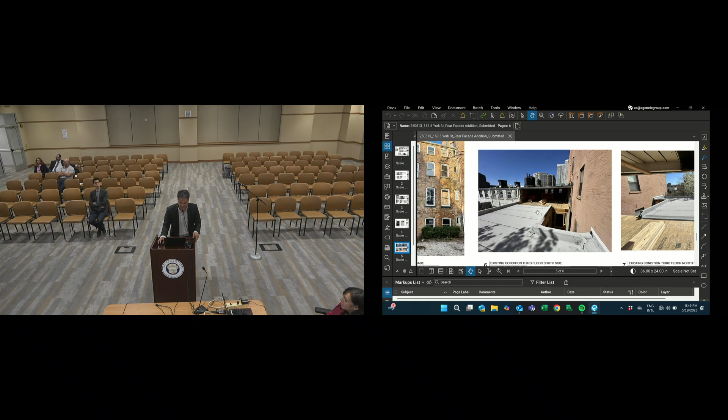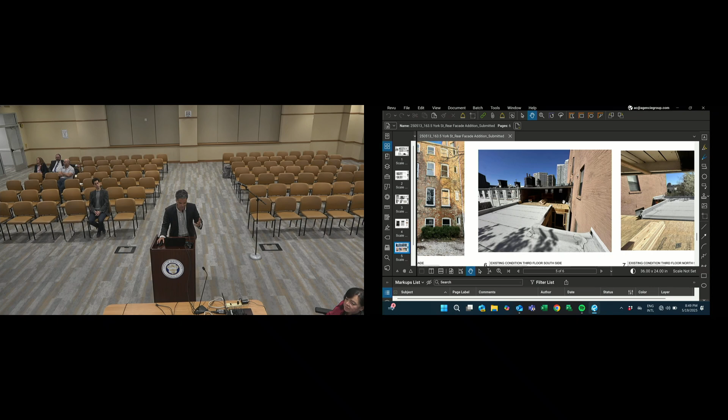When you're standing on the back, the very back of our client's property, looking up, you can't see the top of the addition, so it won't be visible from the garden levels either for whomever might be in the backyards and in the donut hole, so to speak. And that is our proposal.

Any questions from commissioners? So as part of the work that was approved, so that was a staff level approval for a 3-story addition? Yes. Okay. And was the reconstruction of the top floor part of that?

Or, because it looks like it's gone now? We did have the facade in very poor condition, mostly because there hadn't been a gutter on the back over there, and it was just absorbing water over time. So a lot of the mortar was very spalled. We've actually, during construction, had to repoint extensively at the interior of the home on 3 sides. So during demolition in the back, there was a dangerous condition over there, and we did end up having to remove that top floor over there.

Although we did keep, I guess there were 2 things. We did keep all the masonry from that demolition, A. And B, we had always discussed with staff at the time the idea of wanting to extend, to submit this proposal that we have here before us.

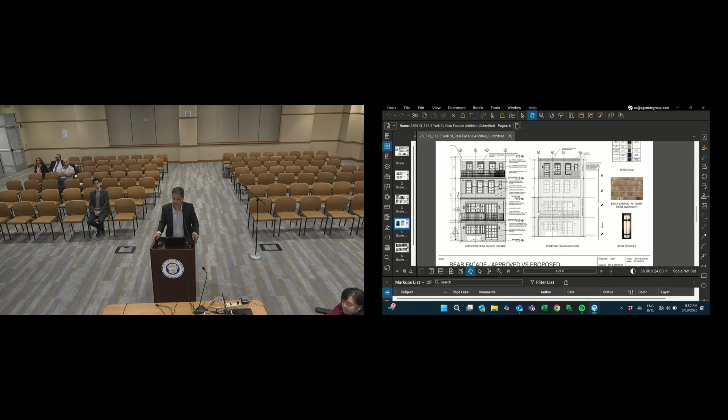Okay, and I have seen this before where, so was the rest of the facade removed below the top story? Yes. Okay. Because that is unfortunately a common problem I've seen where when the rest of the facade below the top story is removed, there are issues if it's not properly braced, or issues with the rear facade that make the top floor of the rear facade need to come down and be reconstructed. But I guess staff was properly notified of this and the bricks were kept in a safe place.

We did keep all the bricks intending to reuse them. Okay.

I mean, assuming that the drawing on the left on the screen right now is from that first application, in that application the note says rear facade to be constructed of brick recovered from demolition of existing facade. So is it the case that when that prior application was before this commission, you had expected to demo that top story?

We were aware that the facade was in very poor condition, but not fully certain. I think it became much more apparent after the property was gutted, and you could really see, particularly on the inside, how much mortar had spalled away over time. It was like dust, you could sometimes just pull the bricks off, so it was a bit of a delicate situation during construction. I guess the follow-up question would be...

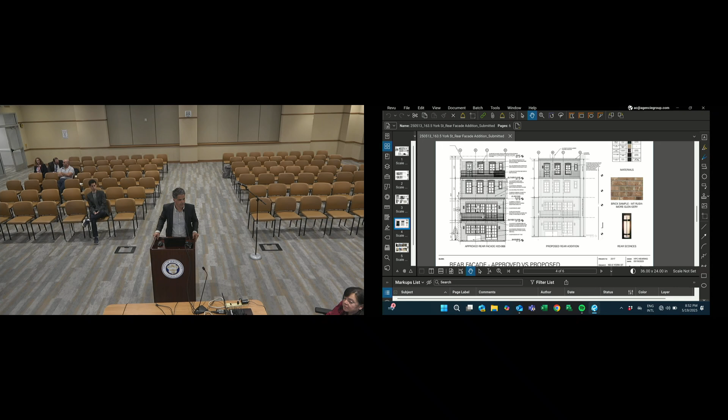The new facade notes the Glen-Gery spec. Are you still considering reusing the bricks that you've saved? So the total percentage of recovered masonry is far below what would be required to fully reconstruct it using that masonry. We do have a pile of it in the back. So in theory, if we wanted to reconstruct the top floor out of that masonry, there's probably sufficient for that, but there wouldn't be sufficient for the entire facade.

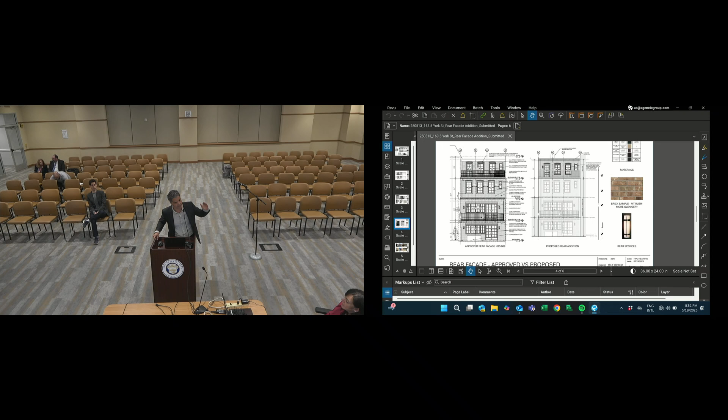Yeah. And so this building is part of, so my concern is that there are at least 2 other buildings to the west that are part of the same row, have the same pattern of punch window openings, and in the same plane. Is that the extent of it, or is there any other buildings as part of this row?

I know there's a big former industrial warehouse building a couple buildings over. This one is what I think you're talking about, the 160. Yeah, that's the so large, I think we can see 160. So this is 163.5. Okay. Right, 163 is to the right. That goes back much further.

Okay, so there's only these 2 buildings to the left that are part of this row. Correct. And 165 York has an addition as well, and it's an odd sort of geometry next door there.

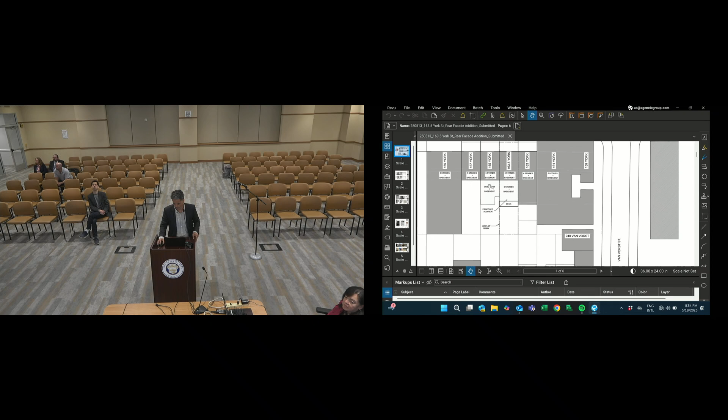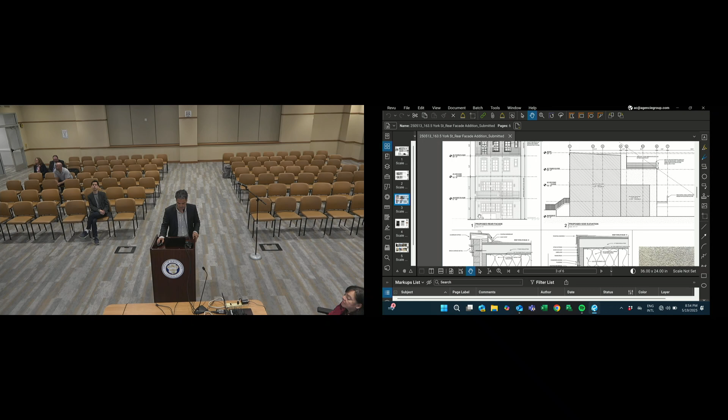Yeah, I have a question. Is the height of the rear facade changing at all? Because it looked in your side-by-side elevations, maybe it was being raised a bit? We did raise it a little bit because of the head clearance. Let me see if I can...

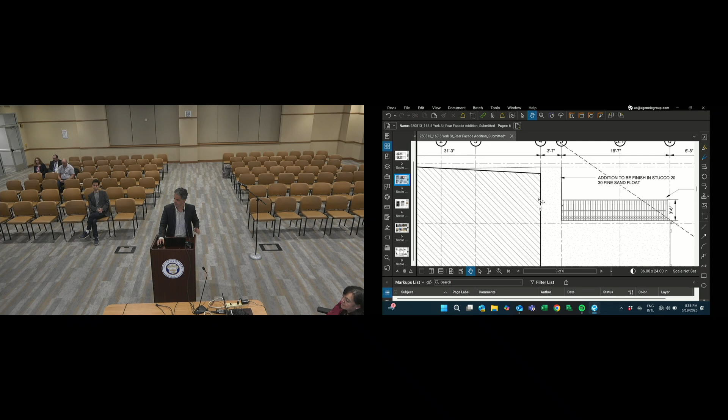That slight increase in height is just to allow for comfortable head height inside the enlarged space. It's already low as it is. At this location inside, it's like 7 feet—possibly even less than 7 feet, I remember feeling stuff on my head. But otherwise, the punched openings are the same. They're already in the same position. The goal is to, as much as possible, recreate the prior configuration.

Any further questions? Okay, if that concludes your testimony. Yes. Okay, then we can move on to public comment.

If there are any members of the public who would like to address the commission regarding this application, please approach the public comment mic. Staff sees no members of the public present and recommends a motion to open and close public comment. Motion. Second. All in favor? Aye.

Okay, we can move into staff comments. So just piggybacking on Mr. Cortez's comments, the lower 3 stories were approved by staff. Since this new addition, even though it's only 3 foot 7 deep I believe, goes to the roof line and will increase the height of the roof line, it does have to come to the commission.

I did not see the condition of the rear wall beforehand, but having visited it afterwards, the roof height at the very, very back was uncomfortable for me, standing 6'1" and wearing my flats. It's also a very small room, so this addition will make the space a bit more functional.

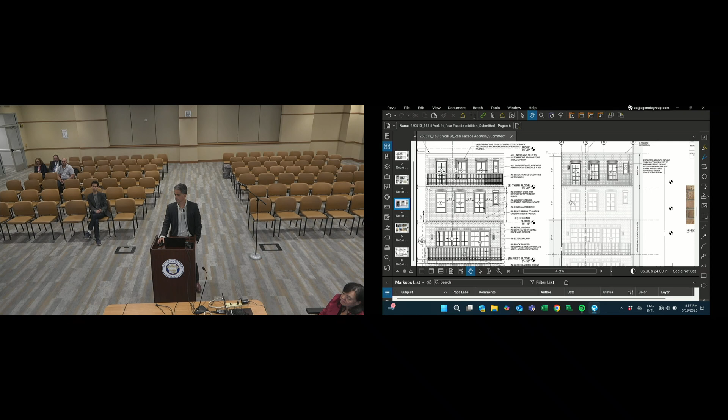So again, staff's recommendation this evening is for a motion to approve the certificate of appropriateness with conditions in the staff report. Can I just have a question for staff? So this new addition is going to be how much further out?

I believe it's, how many feet? The top story addition, the single addition we're discussing now, it's 3 feet 7 inches out. Do you have any concern with this being in a forward plane from the other 2 buildings to the west?

No. What about the stucco on the side? Stucco was already approved by another staff member, so I think it would be better to be consistent with the paradigm of the addition below.

Motion to approve. Okay, we have Gunther, second, and Sakong. Do you agree? Do you and your client agree to the conditions in the report? Yes. Okay, great. I'll move on to a roll call vote.

Commissioner Sandcamp, Aye. Commissioner Gunther, Aye. Commissioner Sakong, Aye. Commissioner Blazak.

I'm going to vote nay. I do have concerns with the changing of the plane of the rear facade as compared to the buildings within the row. So I'm going to cite 341-71, and I'm going to cite Section 3 additions in general, as well as the new construction in historic districts, specifically with roof forms, as well as—there was one more that I had—sorry, I'll just leave it there.

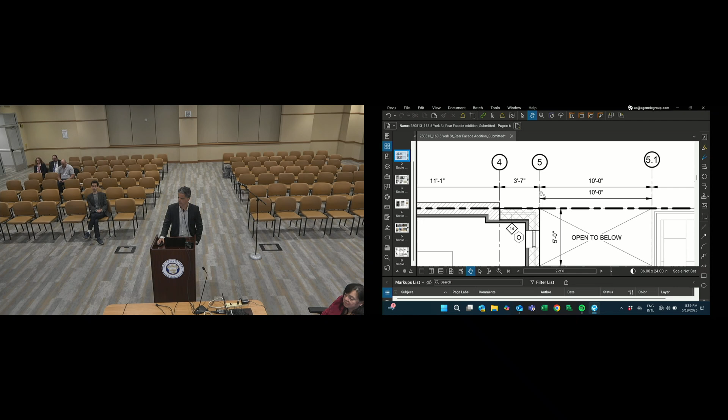The certificate of appropriateness is approved with conditions. Thank you very much. Nice to see you all. Thanks. Have a good night.